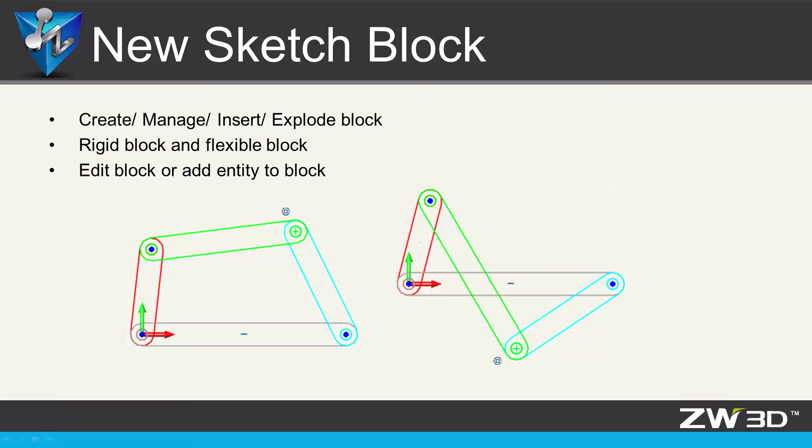New sketch block and customized Ready Sketch. ZW3D 2017 provides a set of block features such as Create, Edit, Manage, Insert, and Explode block. Rigid block and flexible block are also supported.

First, let's take a sample. Use the Slot tool to draw some sketch geometry. Then make a sketch block according to your requirements.

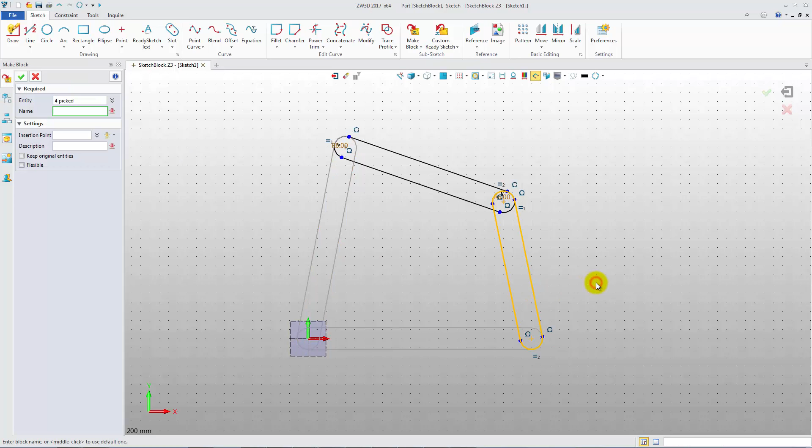Select the entity and give it a block name. Repeat this operation to define other blocks. The second and third are drive rods. The last is linked rod.

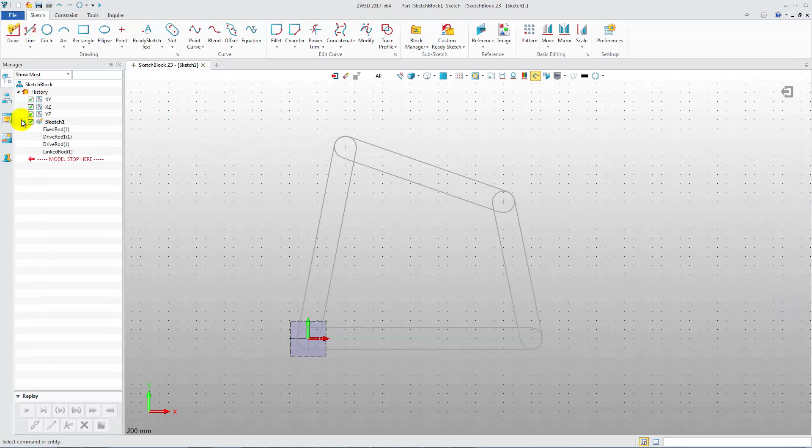We define it as a flexible block. We can view all sketch blocks in the Block Manager. The flexible block is displayed in italic, and the sketch blocks are listed in the History Manager.

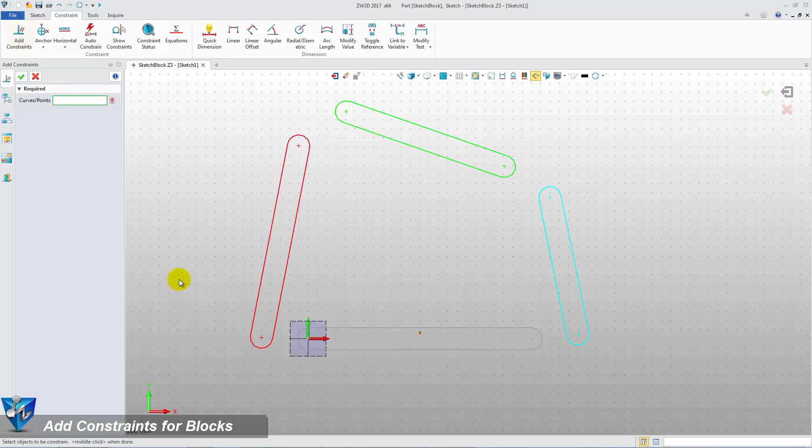Modify the block attribute for a clear distinction between blocks. Check these blocks, you see they are separate from each other. Next, we should add constraints for them.

Add constraints to the first block. Then add the concentric constraints for the adjacent blocks. Do it one by one.

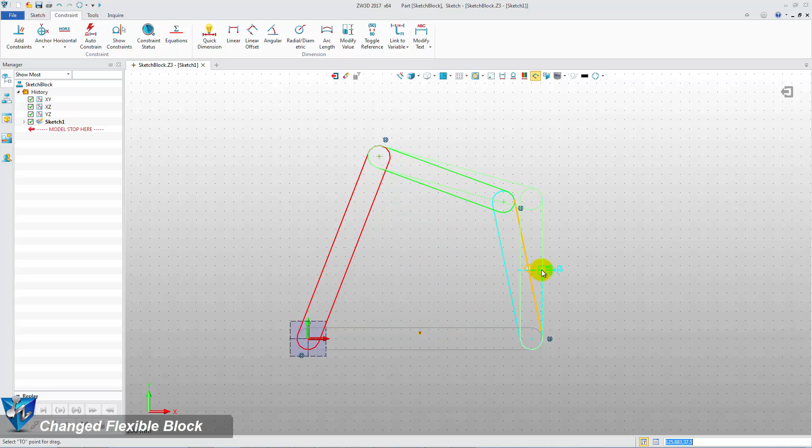Now, if you drag the red drive rod, you will find the flexible block changes in real time. You can also change it by dragging the blue drive rod.

A flexible block can be converted to a rigid block. You can do it in the Block Manager or the right-click menu.

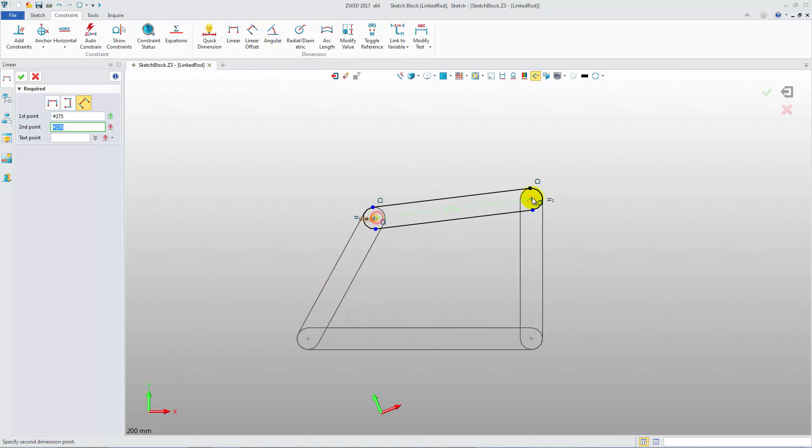Double-click to edit the block. Here, we change the slot length. After editing the block, the sketch is automatically updated.

Let's continue to modify the linked rod length and another drive rod length.

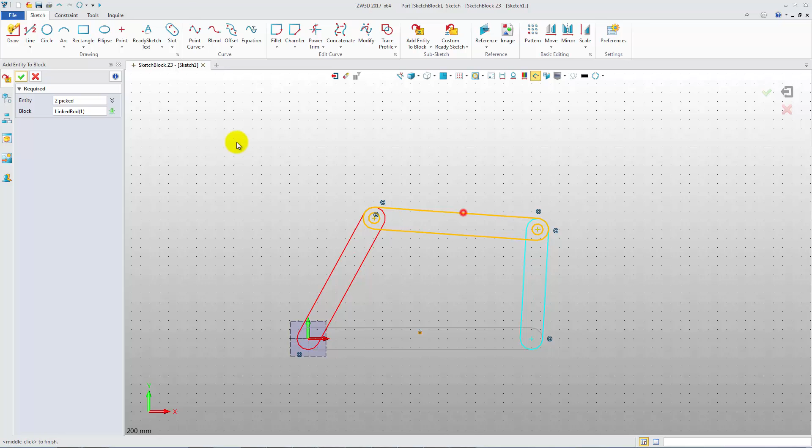If you want to add another entity to the current block, pick the entity and assign it to the block. Then they will become one block.

So far, in the Block Manager, we can view 4 new rigid blocks. Then dragging the linked rod or drive rod, you will find the linked rod size does not change.

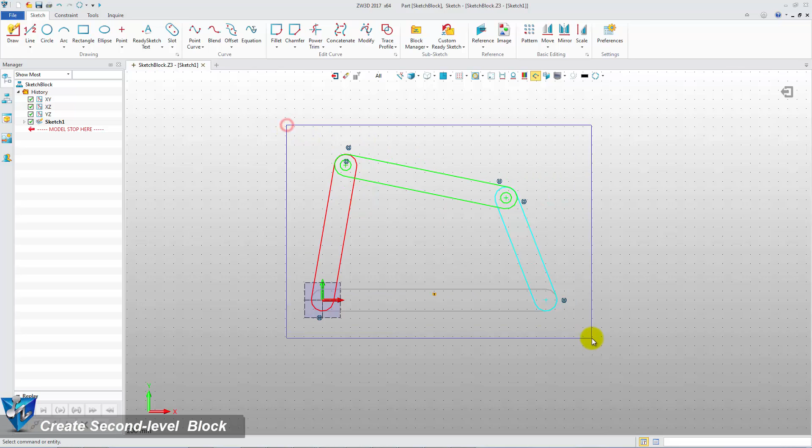Pick these 4 blocks. We can define a new second level block for them. Call it 4-bar linkage and define it as a flexible block.

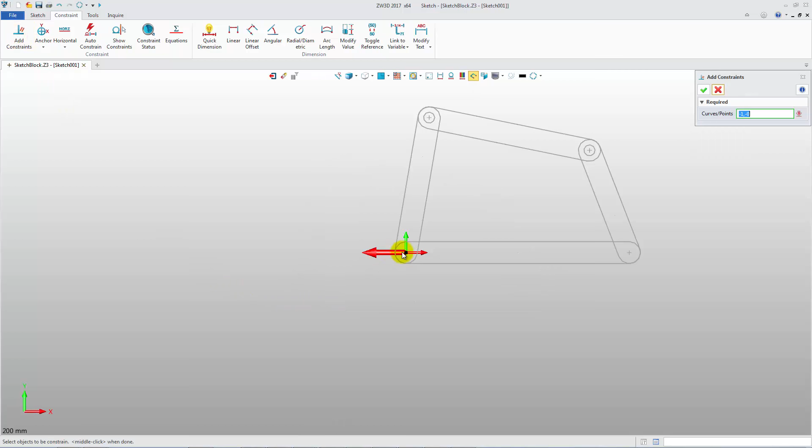Next, create a new sketch in the same file, and then insert this new block. Add the basic constraints first. Then drag one rod. You can view the movement of this 4-bar linkage.

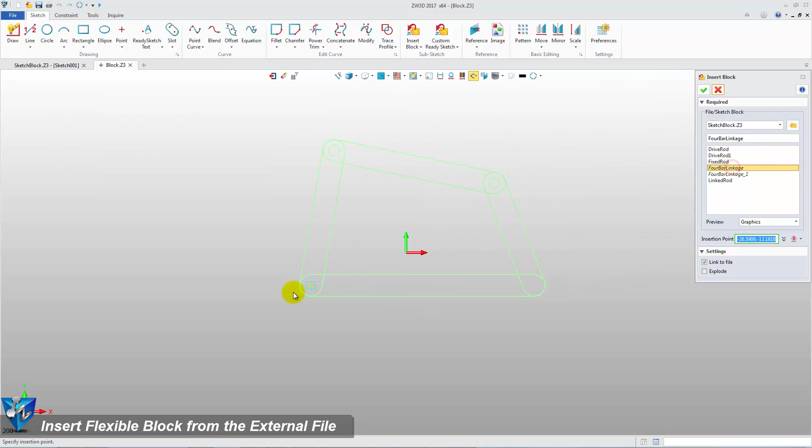Next, create a new sketch file. Then insert the linkage block. Do the same operations.

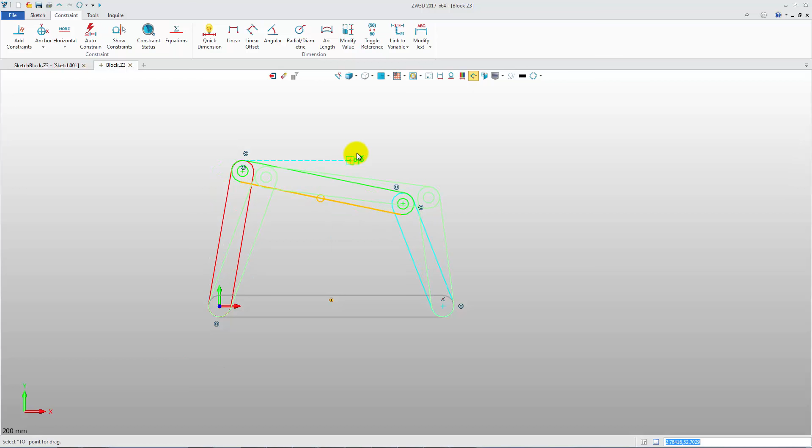You can see the difference. The flexible block from the external file becomes a rigid block. Then you can use the Explode block tool. After that, the first level blocks can be moved.

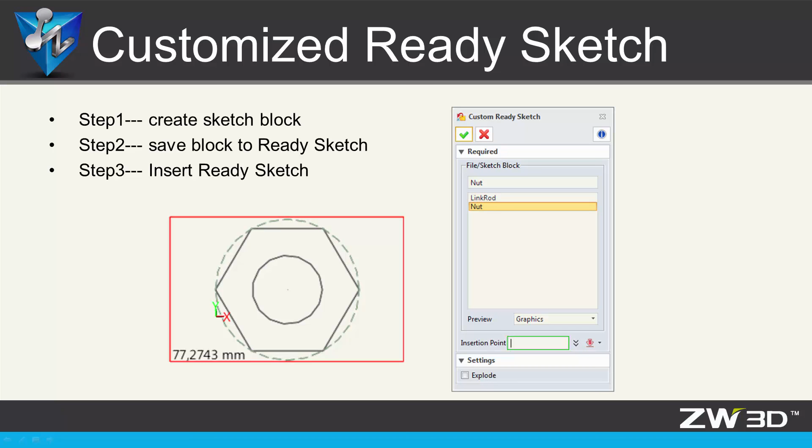Another improvement is the customized Ready Sketch. The preparation work is creating the sketch block.

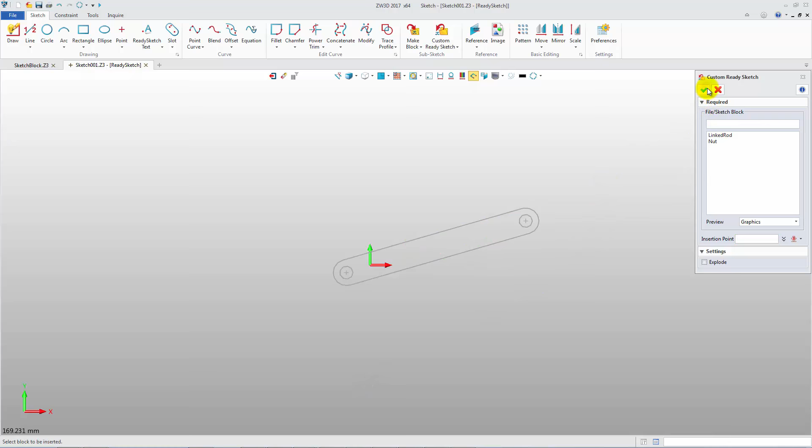Based on this last case, we can directly save the block to the Ready Sketch. Afterwards, we can use the customized Ready Sketch. This is more efficient for sketch design.

The third improvement is more visible interaction. When you draw or edit a sketch, you can show the dimensions of some features and blank some unneeded shapes.

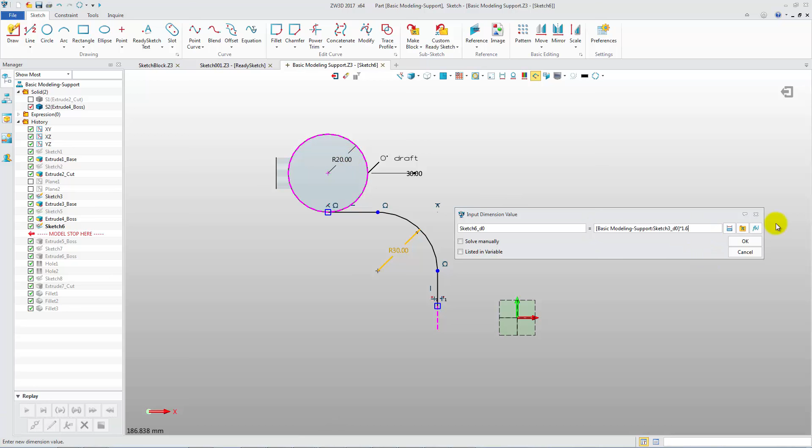Editing the sketch dimension, the external dimension can be referenced. Press F7 to pick external dimensions. Sketch interaction is now much friendlier.